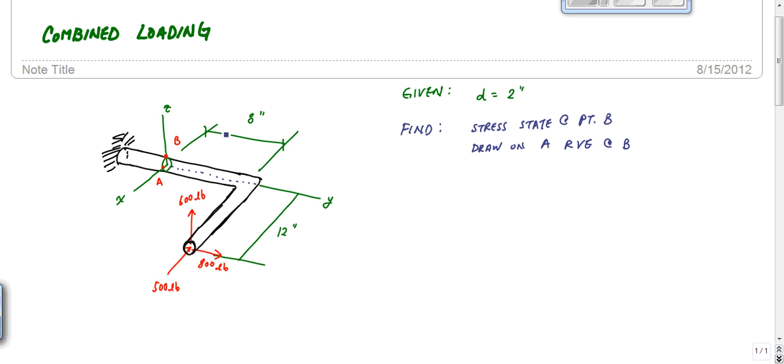So first things first, we've got to find the internal loading at location B, which is 8 inches from right here, 12 inches from here. It's not going to be too bad, but the challenge with these 3D problems is keeping everything straight.

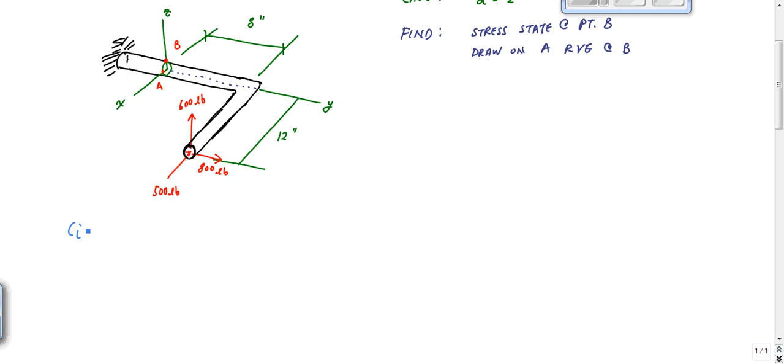But this is all straight up from statics. So one, let's calculate internal loading - something we've done since we first started mechanics. It's so fundamental to mechanics, calculating the internal loading, and if you can't do that, your problems are going to probably suffer.

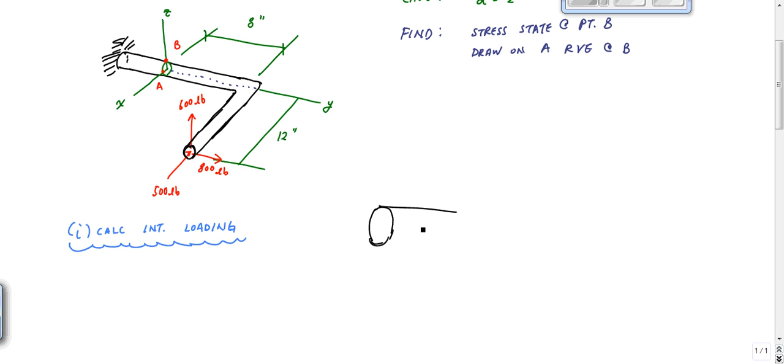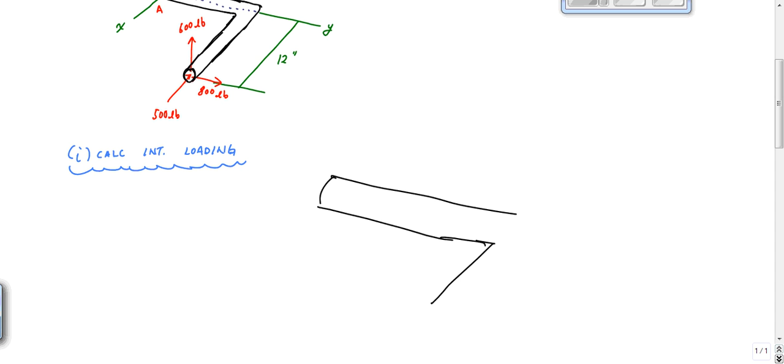If I cut it right here at this 8 inches, let me draw it a bit bigger. If I make this cut right here, then the rest of the pipe is coming out like so. Good drawing is important here. Let me cut it like this, and then the pipe is coming out like this, and this is the other part of the pipe.

When I add the shading, does that look like it's 3D? Not really, huh? Gosh, that's why I'm not a graphic artist or anything.

But here, this is 600 pounds, this is still 800 pounds, and we have 500 going this way. What you want to do here, importantly, is that I have this cut surface right here.

You want to make sure you draw the coordinate system the exact same way. So here I have x, z was going straight up, and y is coming out right here like that. What you want to do also is, instead of trying to remember positive bending, negative bending or anything like that, you just know that you have 3D, so you have moments and forces about each axis.

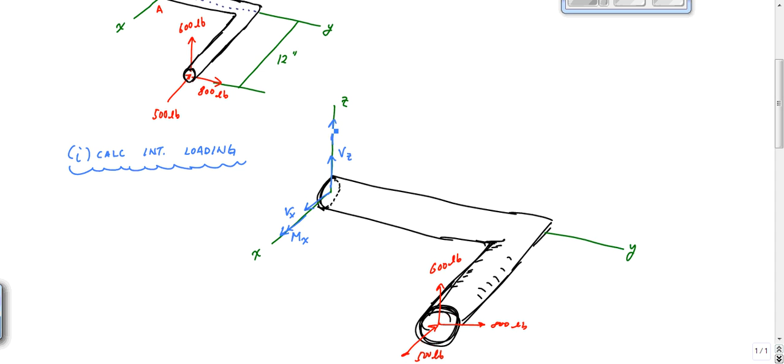So on the inside, internal loading wise, I have a shear force in x and a moment about x. This is how I'm going to draw it. I have a shear force in z and a moment about z, like this. And then I also have a normal force in y and a moment - that's not a very good drawing - a normal force in y and a moment in y.

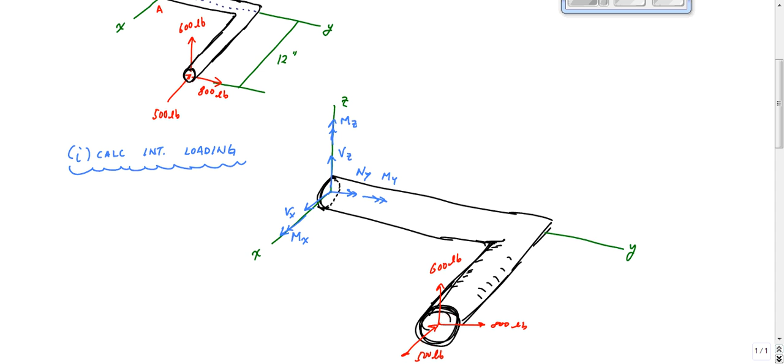I'm going to worry about what's in compression, tension, and what direction the stresses are going based on these arrows later. I'm not going to overthink it and try to apply some positive sign convention and get confused. So I have that right here. Now I'm going to apply equilibrium about each axis and calculate. In this problem there are 6 equilibrium equations.

So we're going to go one at a time. Let's start with x. Sum of the forces in x equals 0. This way is positive x. So I would have Vx minus 500 pounds equals 0. That tells me Vx equals 500 pounds.

Then I do sum of the moments about x equal to 0, with moments about x this way. In this case I would have Mx. What induces a moment about x? 800 pounds is on the xy plane, so no. 500 pounds is also on the xy plane, so there's no distance that causes rotation about x. But I have 600 pounds times an arm of 8 inches - this distance was 8 inches, and this was 12 inches right here.

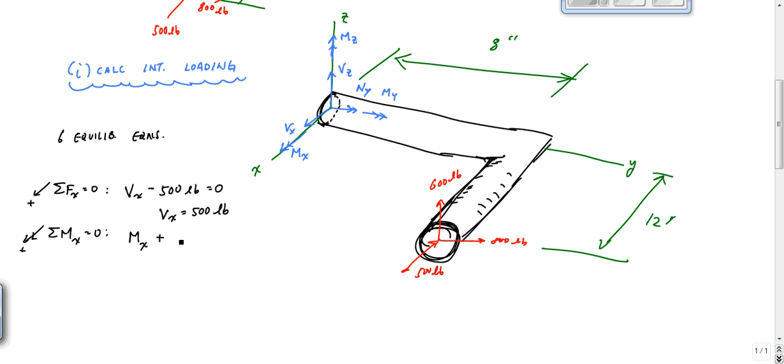So I have Mx, and this induces a positive moment about x. Mx plus 600 pounds times 8 inches equals 0. Everyone okay with that? That looks okay, I can live with that.

Then sum of the forces in y equals 0. If you're watching this video right now, you might want to fast forward this. Sum of the forces in y equal to 0, this is plus, so you had Ny plus 800 pounds equals 0. That tells me Ny equals minus 800 pounds.

Then I do sum of the moments about y equal to 0. That would tell me - do I have any moments? I would have My, and then minus 600 pounds times 12 inches equal to 0, which gives My equals 7,200 pound-inch.

This is the most important part of any problem - you have to do the internal loading right.

If you can't apply equilibrium or internal loading, it's going to be tough to do anything else. So, sum of the forces in the z equal to 0, upwards this time. Here I have Vz plus 600 pounds equals 0, so Vz is minus 600 pounds.

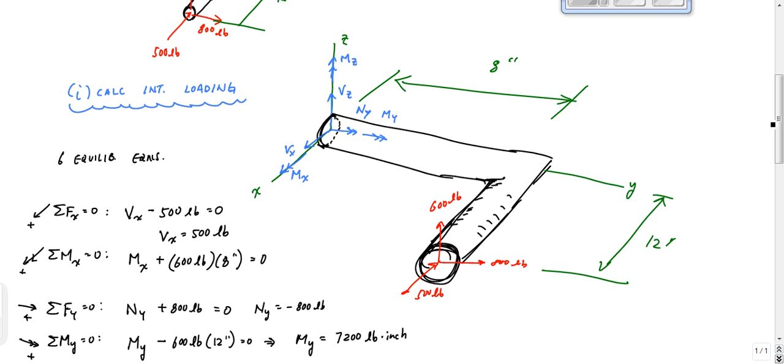This equals 0, and then I would get Mz equals some number. Minus, no, that should be positive 500, because it's going around in the same direction as positive Mz. Same thing with the 800. So right there, 9,600 plus 4,000 is 13,600 negative pound-inches. So here's my internal loading, which takes a long time, but that's what you have to be able to do to solve this.

Oh, I need a number for this. Mx is minus 4,800 pound-inch, like this. And Vx is 500 pounds. Okay, all right, that's pretty good.

Now what? Let's see, calculate internal loading. Okay, so now we're trying to find the state of stress at point B. So now we're going to look at part 2 of this problem. Everything so far was just statics.

Part 2 is now the mechanics, the stress at point B. And really all it means is going one internal load at a time and trying to figure out what stress it causes at point B. One internal load at a time, which is essentially what we have always done. So let's start with the shear Vx.

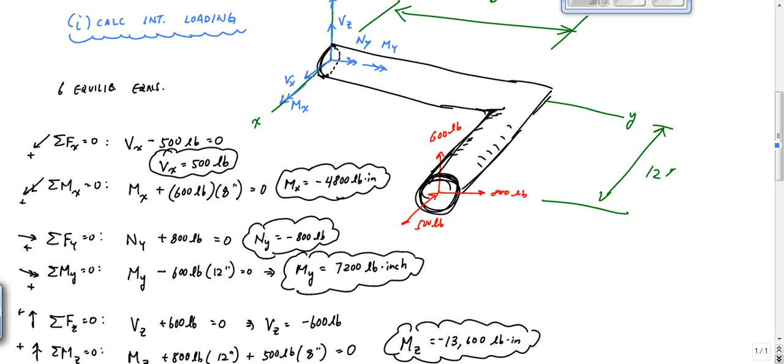Does Vx induce stress? Let's start—I'll call this number 2. This is Vx right here, which if I look at my cross section, I'm going to draw my cross section as an observer for this problem, standing over here looking this way at it.

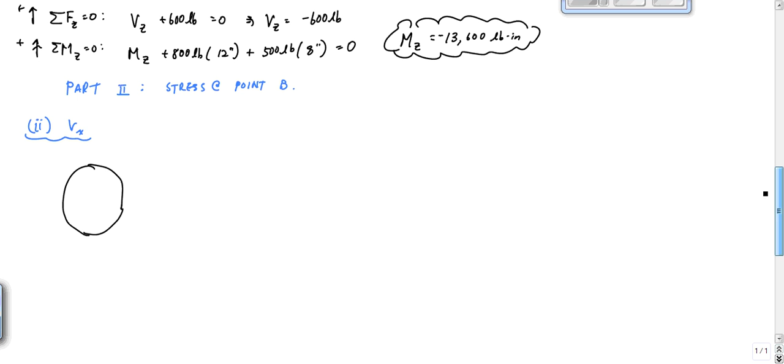So what I would see as the observer for Vx in particular is my cross section, where Y would be going into the page, X will go to the right, and Z will go upwards.

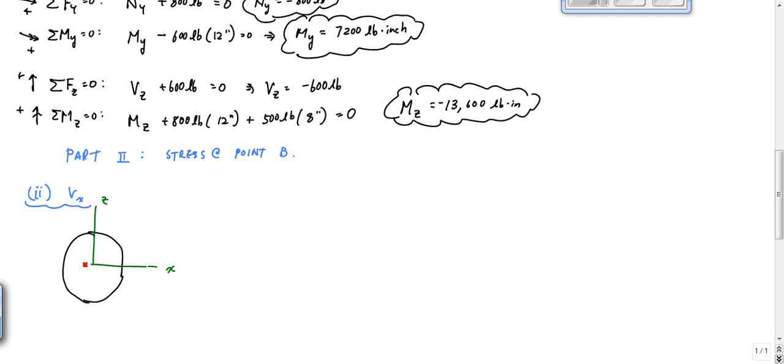Is that okay? And Vx, did we get a positive or negative number? We got a positive number. So that means Vx goes like this—this is Vx on that surface here. And point B, excuse me, this is point B right here.

So the question is, does Vx induce a stress at point B, and if so, what type of stress is it? Yes and shear are the correct answers. Absolutely. So here, the shear stress at B, tau B, due to Vx, is Vx times Q over I times T.

And at point B here, we know what Vx is, we know the direction, and we can calculate I. I is equal to, looking on the equation sheet, pi r to the 4th over 4. Can someone calculate that for me? T is the width of that section, which in this case is the diameter—what was the diameter? 2 inches.

In fact, I don't need your help. This is pi times 1 inch to the 4th over 4, so this is pi over 4 inches to the 4th. Yay. Okay, and then Q

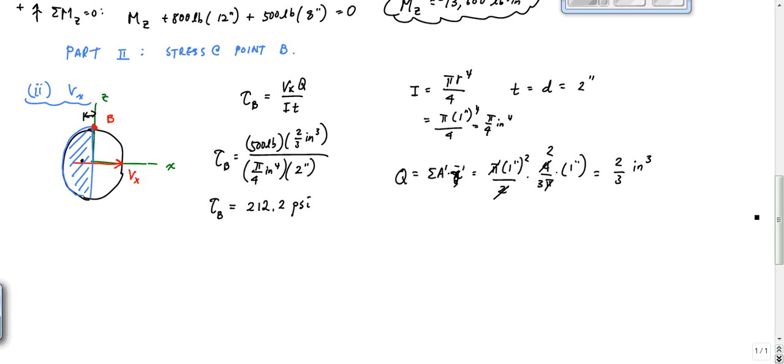Okay, let's go to number 3. Let's check the moment about x, which we found. I'm gonna draw that cross section again because it helps me keep things in order. Here's X, here's Y, and here is point B.

What did we get for MX? Was it positive or negative? It was negative 4,800 pound inch, which tells me it goes this way, 4,800 pound inch.

So does this moment about X... whoa, I almost messed that up. I'm confused, this should be Z, and Y should be into the board. Right there, it should be a Z. So now does this moment, 4,800 pound inch, induce a stress at point B?

The answer is yes, and it is normal, just like me. Normal stress at B is equal to... oh snap, we had this minus My over I equation, but I don't know if that still works here.

I recommend you just calculate the magnitude of this stress, Mx z over Ix, and then decide whether it's positive or negative, compression or tension. What does point B experience, compression or tension? Compression, right? Because I put my thumb in the double arrow direction and my fingers curl to pound on B right here.

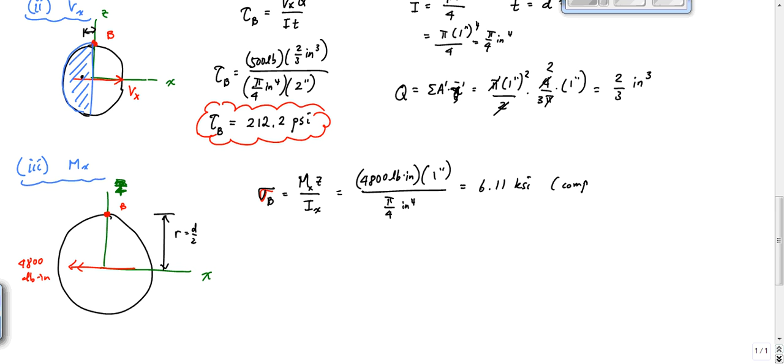6.11 KSI, 6.11 KSI. And this, I will write a little note to myself saying compression, right here. And that was pretty easy, so that's pretty good.

Now let's go to number 4, which was, let's see, what was the next one? Was it VY or VZ? Oh, we do NY. So let's look at NY right here. This is a great problem, good choice, right? We're reviewing everything.

Okay, so NY right here was, what did we have here? NY was, we had in this case, oh I can't draw, so let me draw this kind of in 3D. So here is that surface again, and here is Z, here is X, and here is the rest of that rod right there. And that observer we were talking about earlier is right here.

And so this NY, what did we get? We got a negative number for NY, I believe. It was minus 800 pounds, which means it is going this way, 800 pounds. And this was plus y, was this way, this was the y direction. Right there, and again here is point B.

And on the surface of point B, what is that 800 pounds doing? Does that cause a stress on point B? Yes. And what type of stress does that cause? A normal stress, right? My favorite kind. Sigma B, due to the 800 pounds, is just N over A.

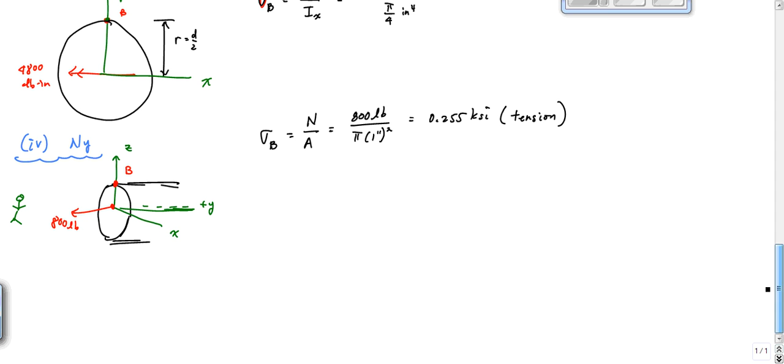Now we have a moment about y. Let me break up a page here. Because I know the direction of my 800 pound, I know this is in tension because the direction of my 800 pounds is this way, and it's pulling on the surface, on this area right here, that surface. Can you see my cursor? Okay, so right there, that 800 pounds is causing tension.

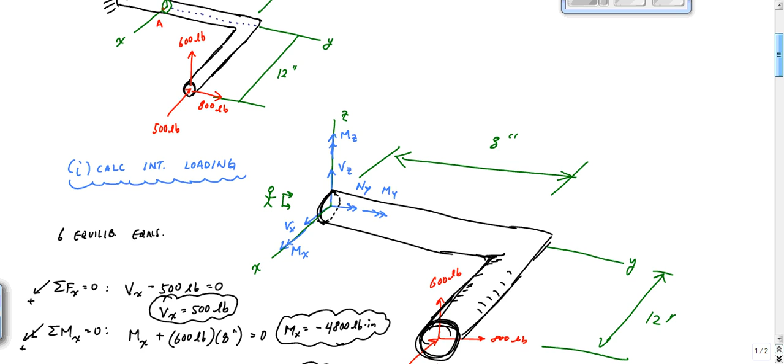Now I want to look at the last part... not the last part, I'm sorry, it's the torsion, the moment about y, MY. Why don't I keep this same 3D type of drawing here? Let me redraw that surface again, like that. I know this is redundant and repetitive, but I just don't want there to be any confusion.

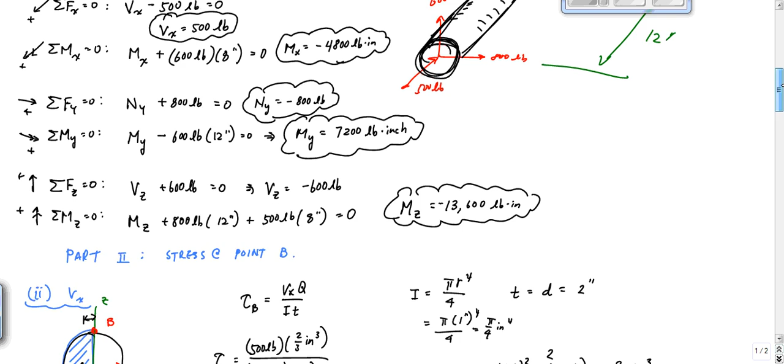X and then Y right here. I really can't break this down for you any better than what we're doing right now. So here, this XY - now what did we get for MY? Was it a positive number or a negative number? So we had MY is negative 7,200 pound-inch, which means that it goes this way. What did we get, is there issue? Oh, it was positive. Okay, let me undo that.